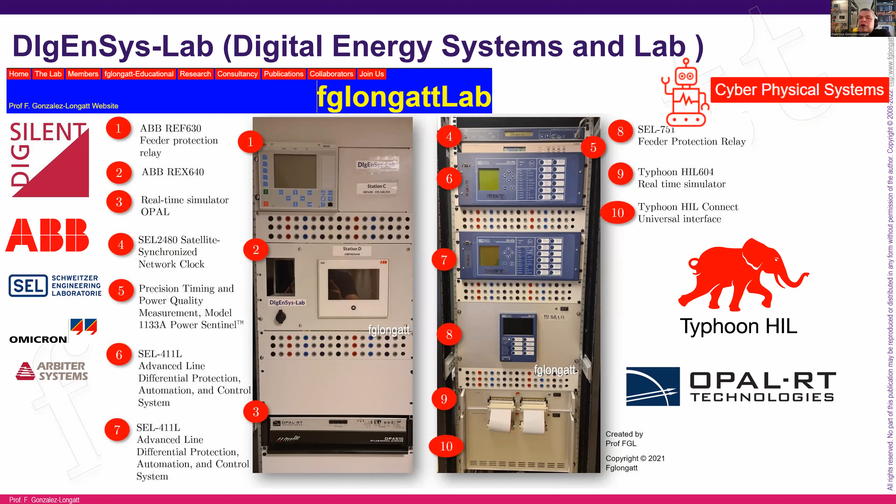What you need to know is that basically at DIgEnSys lab, we have been doing research for the past 3 years using 2 different brands of real-time simulator. Typhoon HIL, that you must be aware of. However, in a minute, I will give you more information. And then also OPAL-RT, another of the technologies that is quite relevant for real-time simulation.

Probably you are wondering, okay, why DIgEnSys lab? Because I am a strong believer that digital technologies can be used to improve the security and the resilience of power system operation, energy system operation. When we are talking about energy systems, there are several challenges around the world. In many countries, you will find issues related with frequency control, system restoration, system stability, voltage control, and thermal.

And to be honest, for all those problems coming from the integration of low carbon technologies, the solution is already near to us. What I can tell you is that in order to deliver secure and resilient electrical energy systems, we need to take advantage of several technologies. We can take advantage of decarbonization.

We are having more electric vehicles. We are having energy storage, and that energy storage is located near to the customer. For that reason, decentralization is a key point of solving the issues. And democratization, giving access to everyone to the market and to the energy system. And finally, for me, one of the key enablers of the future is digital technologies.

Digital technologies is a very interesting term because digital technology involves several things. It involves, of course, data science. You know right now that we care about artificial intelligence, machine learning, deep learning, and so on. This is one area of digital technologies, but also extremely important for digital technology is the hardware.

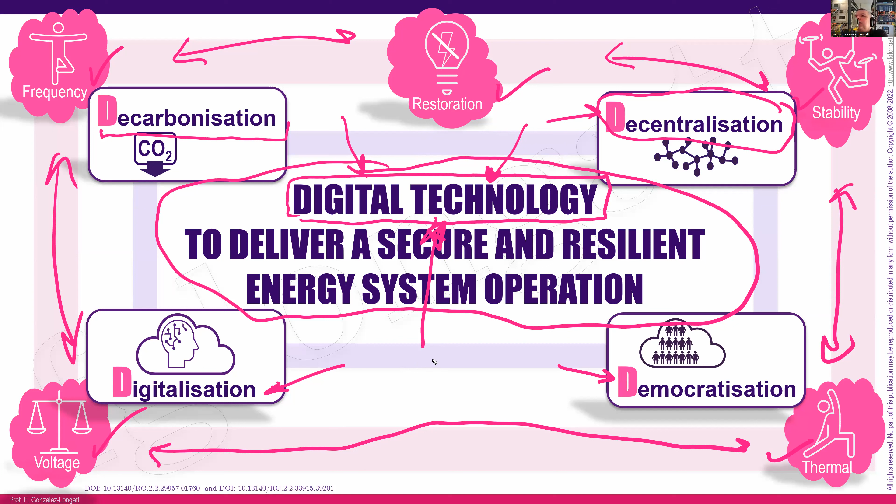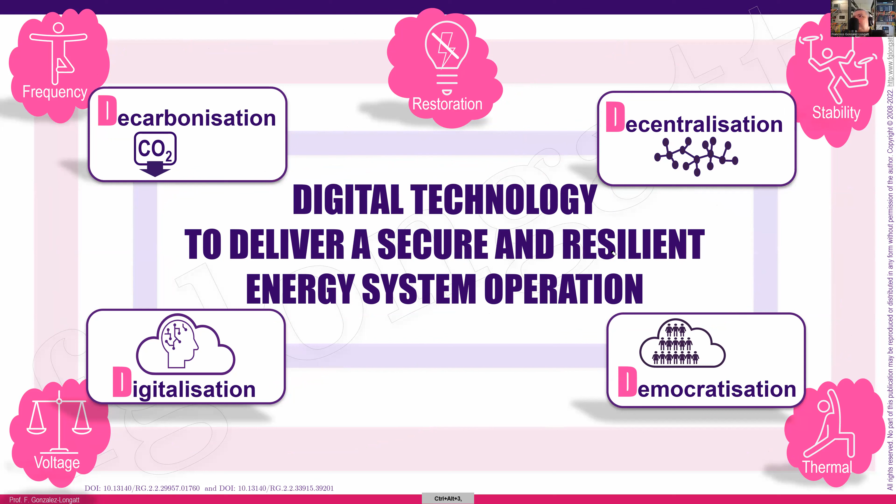The hardware, the computational power, is one of the key enabling technologies for the secure and resilient future energy system. And of course, the communication. We are living in a digital era, and communication is one of the key points. For that reason, today my presentation will basically show some of the digital technologies using real-time simulation in order to increase the security and the resilience of the electrical power system.

Well, this is the end of the introduction, and now I need to show you the agenda for today. The agenda is very simple; to be honest, it is very short. We will start with some general concepts. I usually like to go very slow at the very beginning and show you some basic concepts, because there are many people that don't understand those concepts. Then I will go through the different types of simulation in electrical power systems. Some of those simulations you already know.

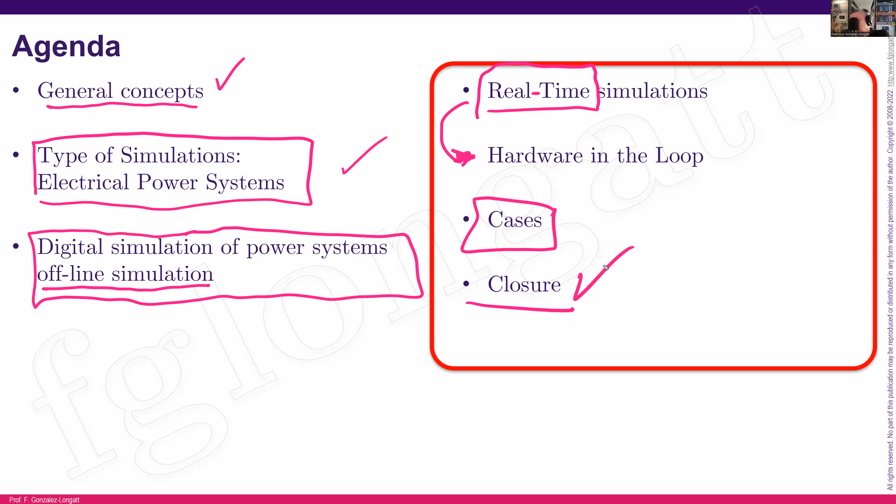And then I will go to digital simulations in electrical power systems, initially offline, and then I will go to the beautiful real time. I will focus basically on hardware in the loop, which is one of the paradigms used for real-time simulation. Then I will present some cases, and finally, we close this presentation, okay? Let me start with the concept.

Everyone in this classroom, everyone in this area knows a system. A system is basically a set or a group of different components interacting with each other, and all of them have a set of rules that unify the performance. For instance, in electrical power systems, we can imagine this as a small power system. We have a generator, we have an infinite bus bar, we have a transmission line.

However, if we look more into detail, we can see that the generation unit has several subcomponents. We have a thermodynamic system, if we consider this a steam turbine. We have a mechanical system, that is basically the steam turbine. Then we have the electrical system, starting from the generator, from the stator of the generator, going to the infinite bus bar. All those components have different environments and different physics behind them. And that is the starting point of the complexity in the electrical power system.

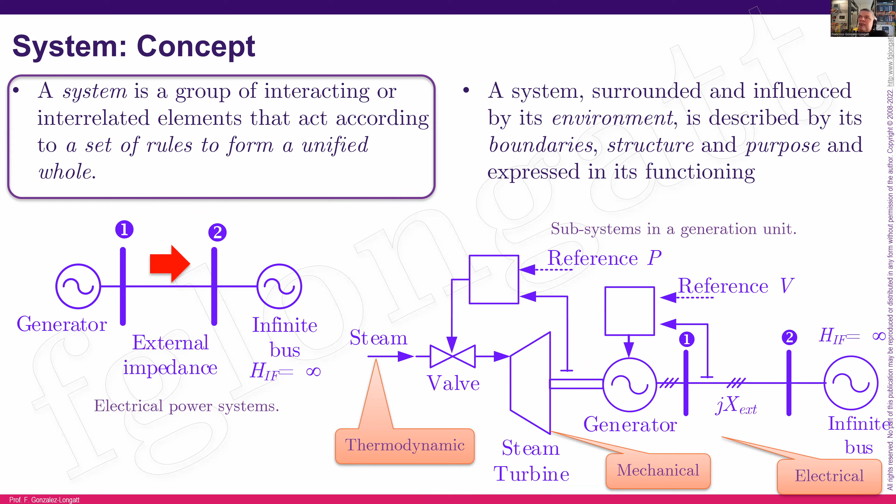On the other hand, the reality is that the systems are very, very complex because power systems especially are basically dynamic systems. The dynamic system comes from the original Newtonian mechanics. However, the concept is applied to electrical power systems because in reality, the electrical power system is a system where the state variables are evolving over time. And these changes in the state variables basically follow the possible changes coming from the input variables, but also some strange or difficult signals like disturbances, okay?

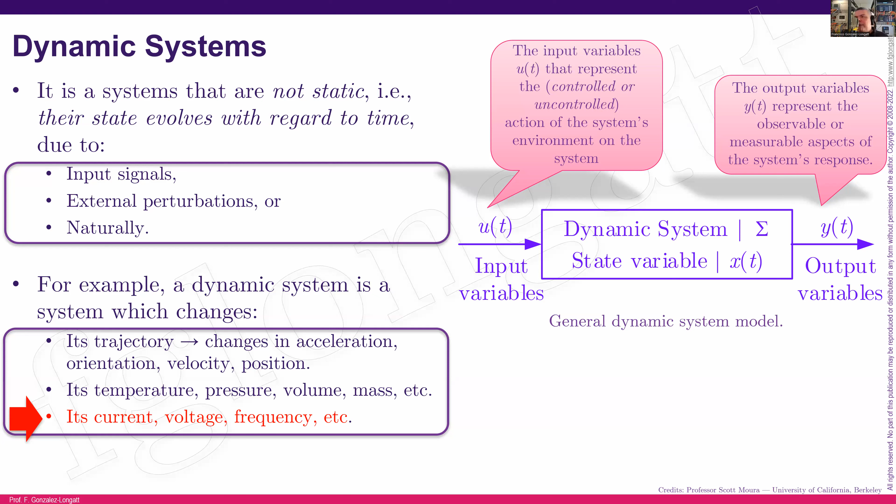However, electrical power systems are complex. They have different physical natures: thermodynamical, mechanical, electrical, and so on. However, the core for electrical power systems is to try to create models that replicate all that physics. And that is where the problem starts to be very interesting. Because in reality, we have the electrical power system with all the physics, but then we try to create a mathematical abstraction. The mathematical abstraction comes from the model and the equations. And then when we have this model and the equations, what we try to do is basically solve those equations in order to get the system response.

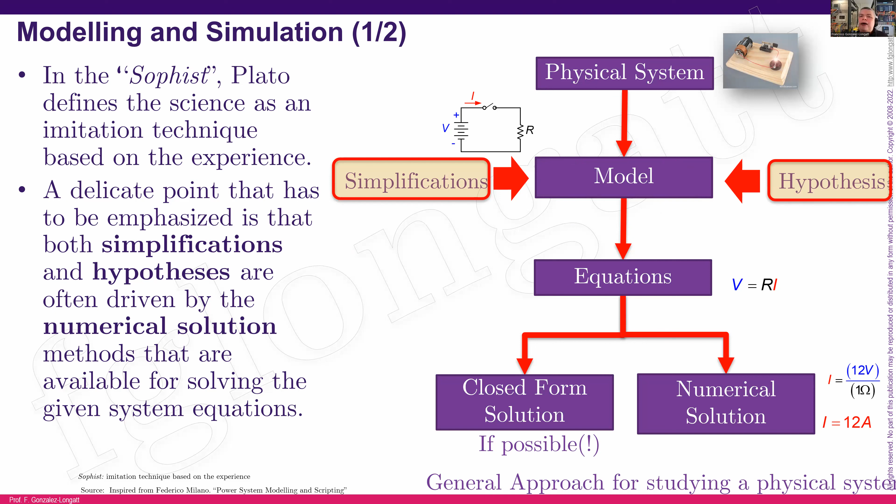To be honest, this is a process that looks very simple. However, there are two very important parts during the modeling stage. One is the hypothesis that we are following, and then the simplifications, because every single model has some simplifications in order to work. For instance, depending on the level of detail that you are interested in, you can model an inductor with the classical voltage and current relationship. That means voltage equals a constant times di/dt. However, if you want to get the full detail of the performance of an inductor, well, probably you need to go to the Maxwell equations.

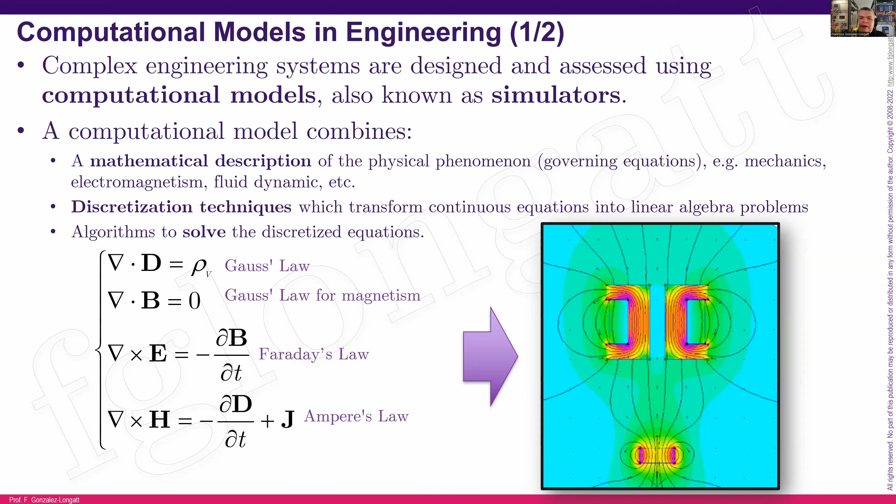What I'm trying to tell you is that the level of detail that you want in your model defines the size, the number of parameters, and the complexity of those models. And the reality is that also the size and the shape of those equations depend on the model. In the computational model, we try to create equations. Of course, those equations can be algebraic or they can be differential.

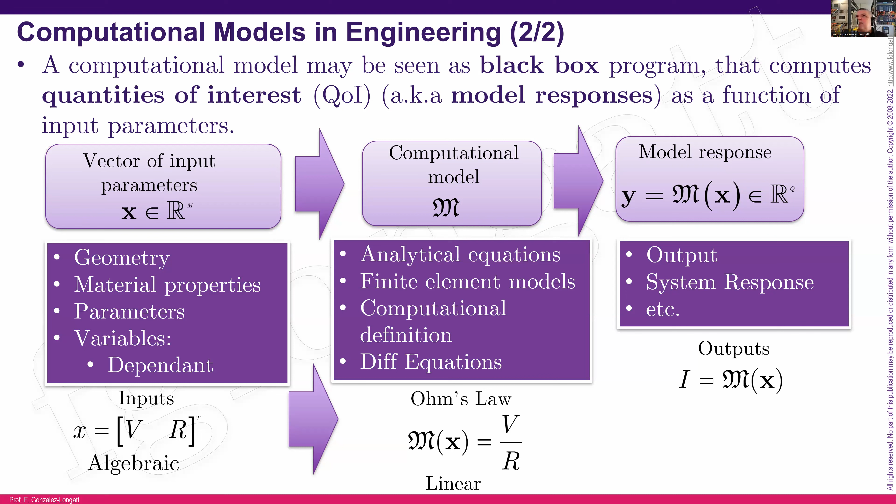Typically for dynamic systems, we use differential equations, and then we try to solve those equations. However, something that is very important during the task of modeling is that many models require validation and also parameter setup. Because in reality, we can have a very good mathematical description, but then that model must be adapted in order to follow the reality. That is the reason that one very important stage during the modeling is starting from an uncalibrated model that is not able to follow the data until we use some mathematical techniques and calibrate the model in order to follow the real data.

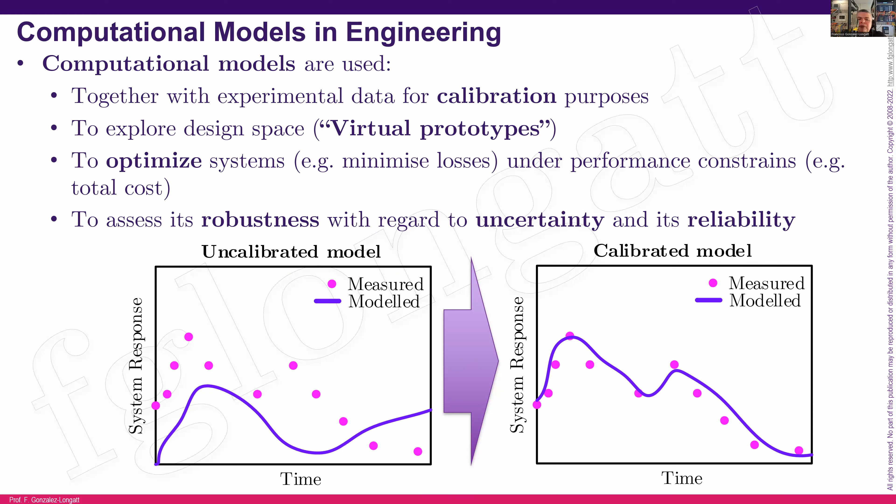However, even the most detailed and the most powerful models always have some possibility of miscalculating or misrepresenting the reality. Here in this slide, you can see something quite interesting. Here we have the 24-hour forecasting of the load demand in the Spanish system. And what is interesting here is if you look at a very small time period, you can see a very small deviation of the real demand from the forecasted demand. Many people will say this is probably a very small error, but if you look at the real numbers, we are talking about an error that can be 534 megawatts. That is huge in terms of power plant production.

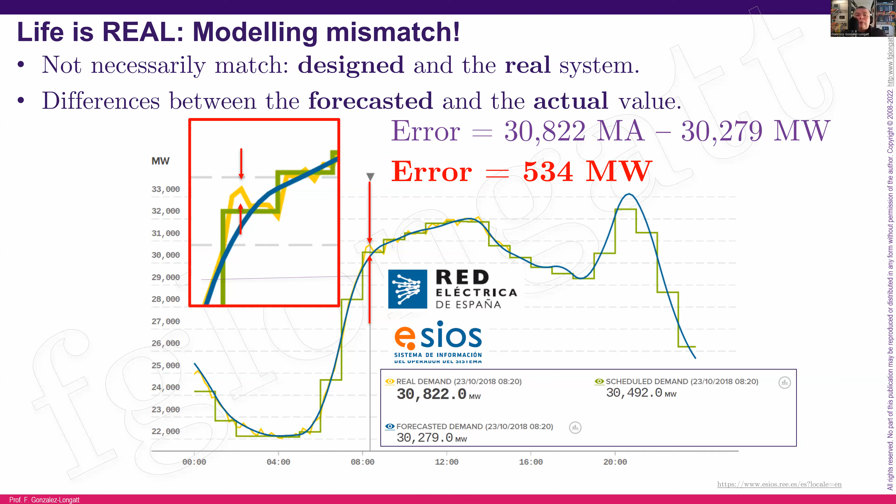What I can tell you is that basically the models have some uncertainties when they are working with the parameters, but also with forecasting. And the sources of those uncertainties can come from many, many places. For instance, from the load. The customer behavior is something that is very difficult to forecast, even using the most modern artificial intelligence techniques. Also, generation. Right now, we are installing a lot of renewables, and forecasting the PV or the wind speed is relatively easy. But if we consider the clouds that are obstructing the sunlight, that is a more difficult system. Then we have uncertainty coming from the controllers, from the parameters, from possible faults, communications, but also uncertainties coming from topology, electrical parameters of the grids, and so on.

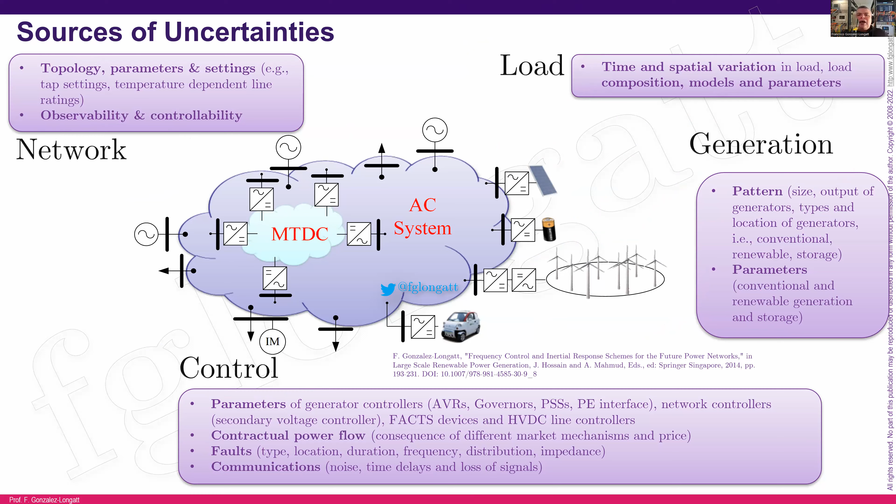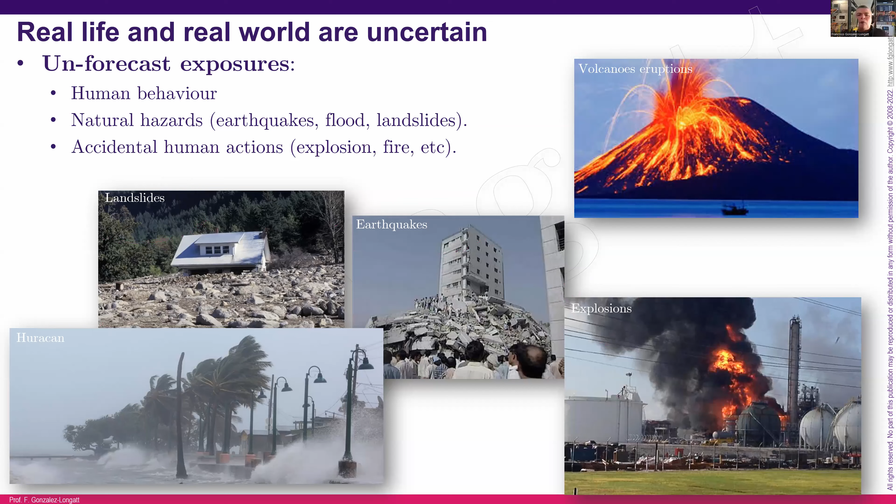However, to be honest, those uncertainties are very simple and can be managed. And there are in real life some uncertainties that are extremely difficult to forecast. For instance, in real life, we have several events that are very, very difficult to forecast: a volcano eruption, earthquakes, landslides, hurricanes, explosions, accidental human actions. And that is the reason that today we are considering more seriously the concept of reliability. Reliability is now considering uncertainties and also events that have extremely low probability. Reliability is a very interesting concept.

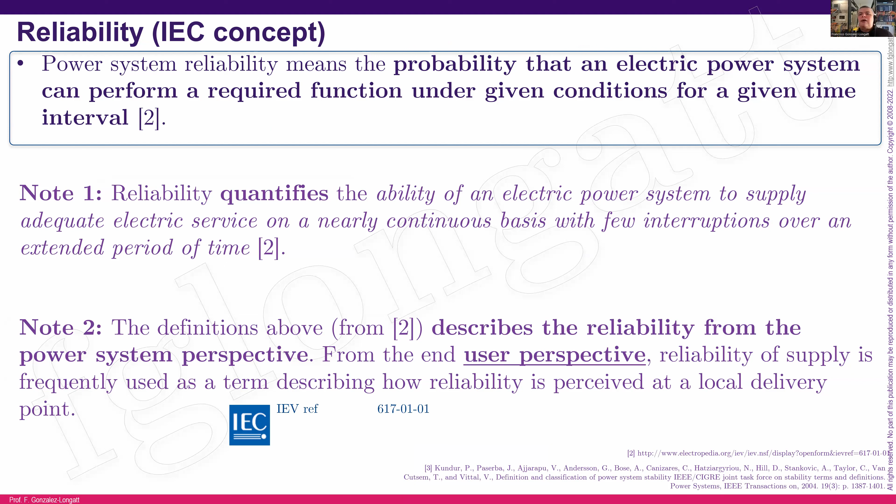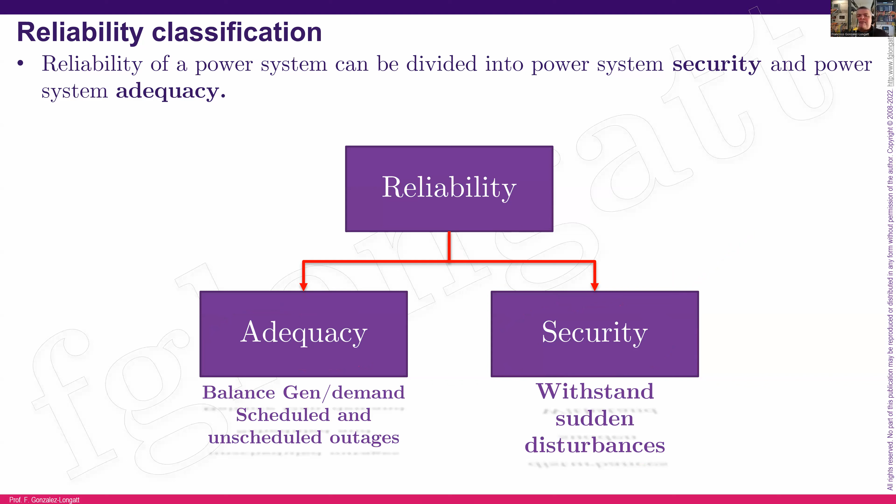Reliability is the probability that the electrical power system can perform its functions under given conditions for a time interval. There are many standards defining that, and reliability is basically divided into sub-areas. One is related to the balance between generation and demand, considering scheduled and unscheduled outages. That is adequacy. However, the most interesting one for me in electrical power system dynamics is security, because security is related to sudden disturbances. And to be honest, those events that I was talking about, like explosions, eruptions, and so on, are related to very low probability, but with a huge impact. And that is the reason that security starts to be interesting.

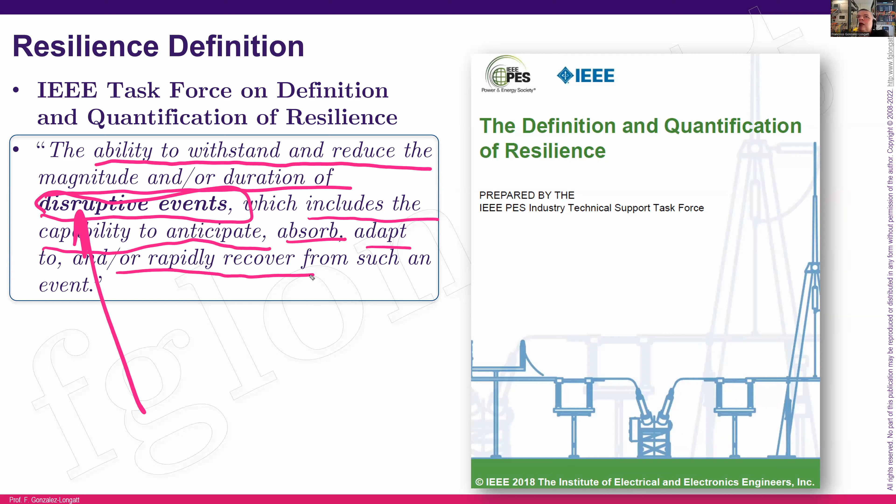In normal condition, what we call pre-disaster, the resilience, the status of the system is normal condition. But if suddenly we have a catastrophic event like earthquake, flooding, hurricane, typhoon, or whatever, well, the status of the electrical system can be disrupted and affected. And as a consequence, the system can experience, for instance, blackouts or a reduction in the performance indicators and so on. That is what we call the disaster stage.

The system has, of course, several controls, but also there are many engineers working in the system. For that reason, there is a possibility of restoration stage. That is the moment that the recovering forces in the electrical system try to reestablish the system status. And finally, there is a possibility of a long-term recovery process.

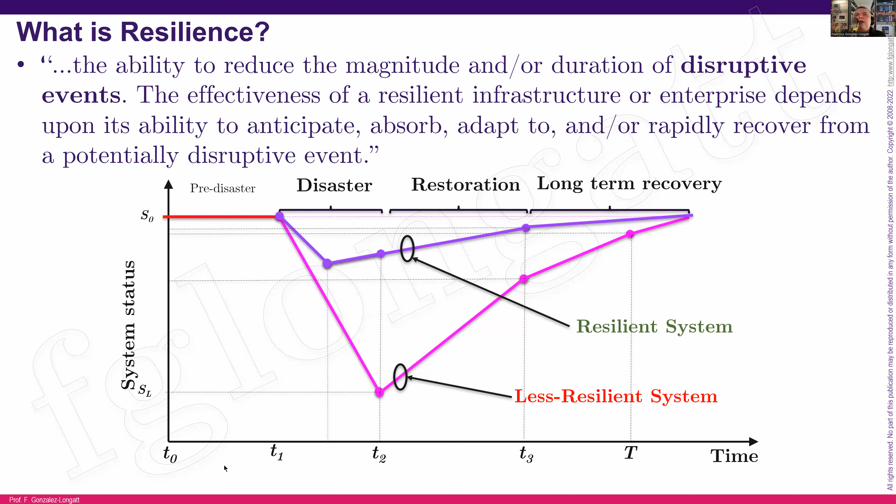Okay, this has been the representation of the resilience. We know the concept of resilience. What is the main difference between resilience and reliability? Well, I believe that everyone in this classroom knows the difference. Reliability is basically related with normal conditions. I mean, with events that have a high probability.

And to be honest, we have many situations in the electrical power system with high probability. For instance, the disconnection of generators, the sudden appearance of a short circuit, and so on. Those events are really bad for the system, but they don't create a disaster. In fact, this high probability makes the power engineers take some actions, and that is the reason that we have protection systems inside the electrical system, in order to cope with this kind of high probability events, minimizing the impact.

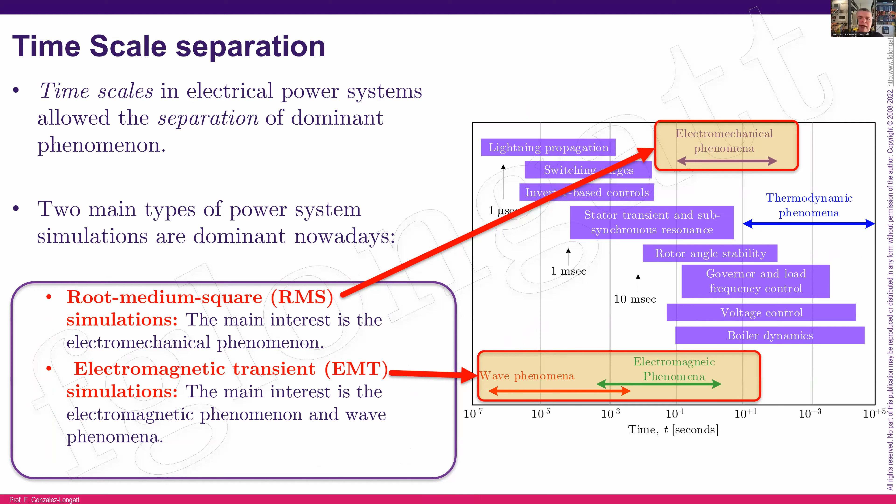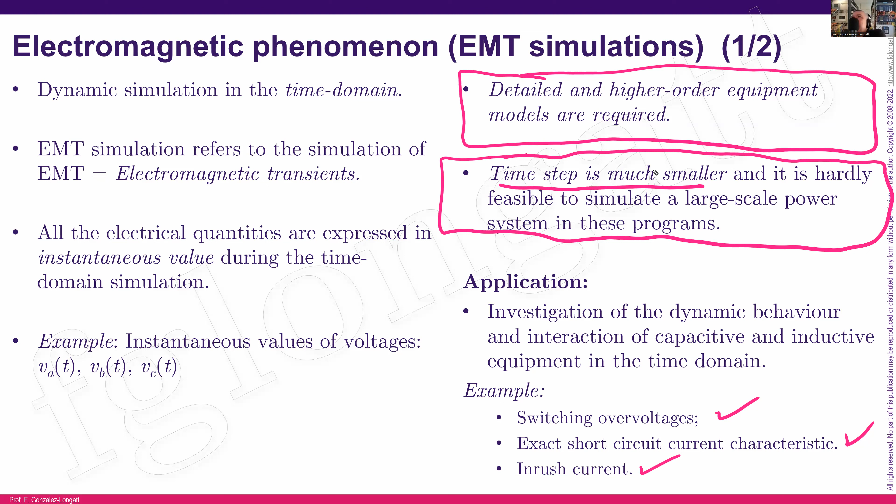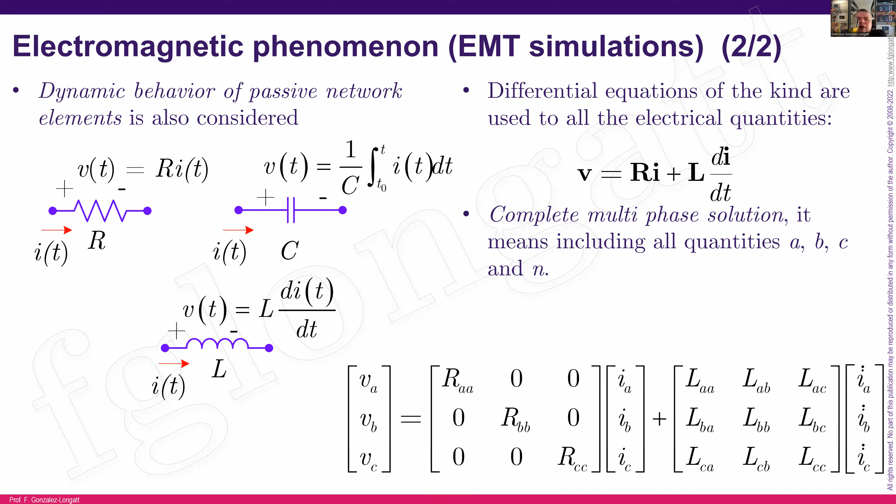And then we have another set of simulations. The other set of simulation is what we call the electromechanical phenomenon, or RMS simulation. In the RMS simulations, we make a very simple and a very interesting supposition.

And we assume, remember that I say assumptions and hypotheses, we assume that the transients related with the transmission lines or the transmission system are very small, very fast. And we can use the concept of phasor. I mean, when we are using RMS simulation, basically what we are doing is using phasors, assuming that the frequency is constant, or the deviation of the frequency is almost zero. And from there, we can use phasors and inductive and capacitive reactance in order to establish the relationship between voltage phasors and current phasors.

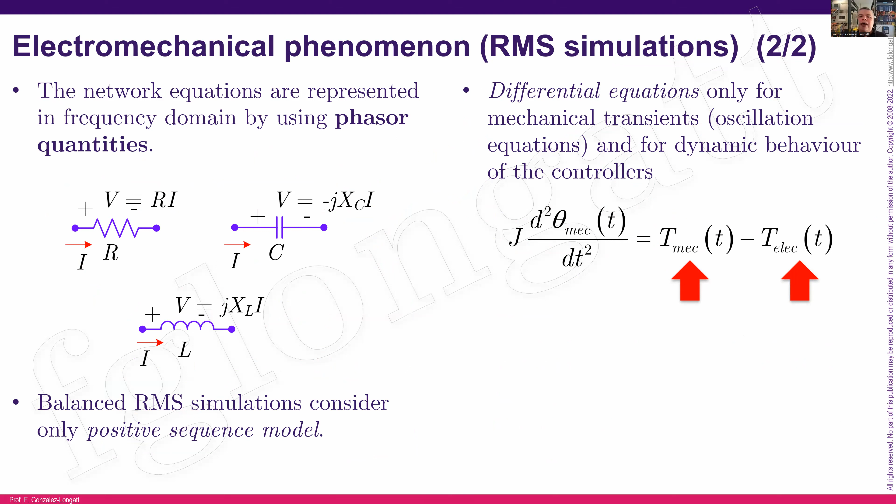Okay, perfect. Now, probably you are wondering why I am talking about this, because RMS simulation is typically the tool that we use for power system dynamics. And basically what we do is consider the dynamic of the electrical machine, the electromechanical dynamic, and neglect all the electrical dynamics. And that is the reason that we have different types of simulation tools.

We have simulation tools coming from many, many decades ago. Probably the first simulation tool that we have was the TNA. The TNA is also called an analog computer. Starting in 1929, we started to use the TNA. And what is the TNA? Well, you can imagine the TNA like very small components. I mean, you have small transformers, small generators, small transmission lines, and you play like a Lego. What you are doing is interconnecting all those devices using low voltage and, of course, getting the measurements.

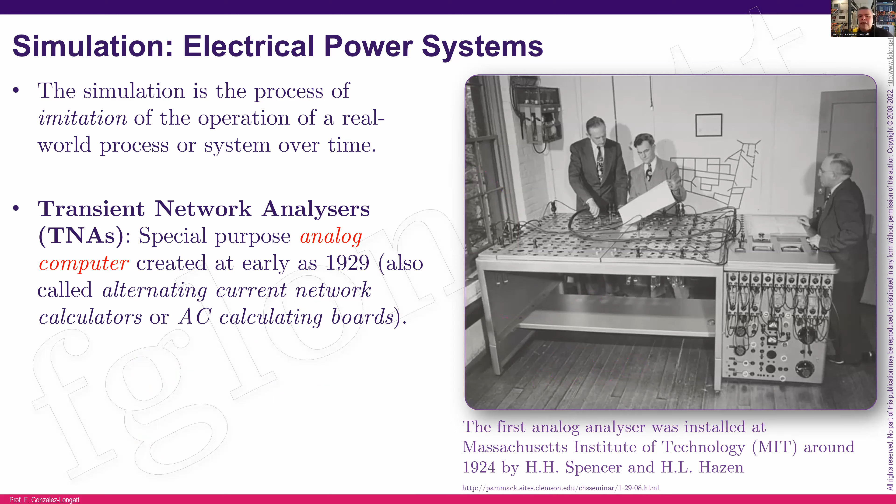What is the advantage of this? Well, this was the first computational tool that we used for simulations in electrical power systems. It was simple and it was useful for steady-state performance. However, there are many phenomena that cannot be scaled down, and as a consequence, the TNA started to be not so useful. The next step in the computational simulation of electrical power system analysis was the digital computer.

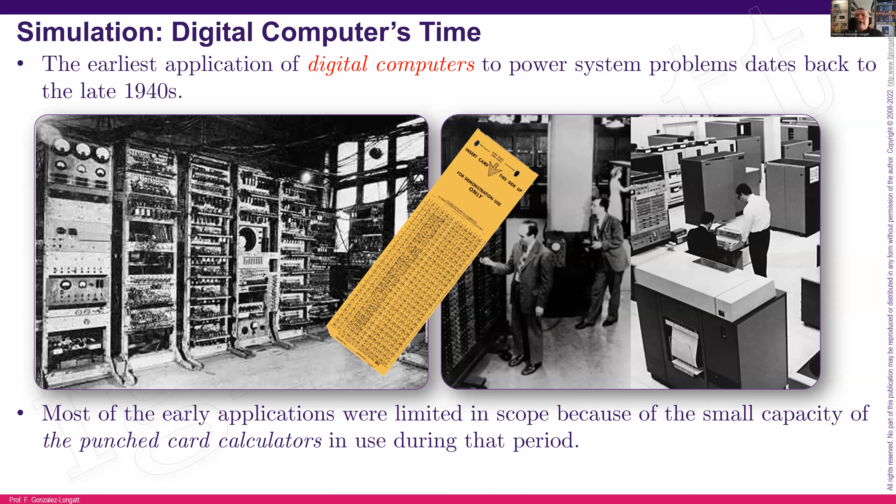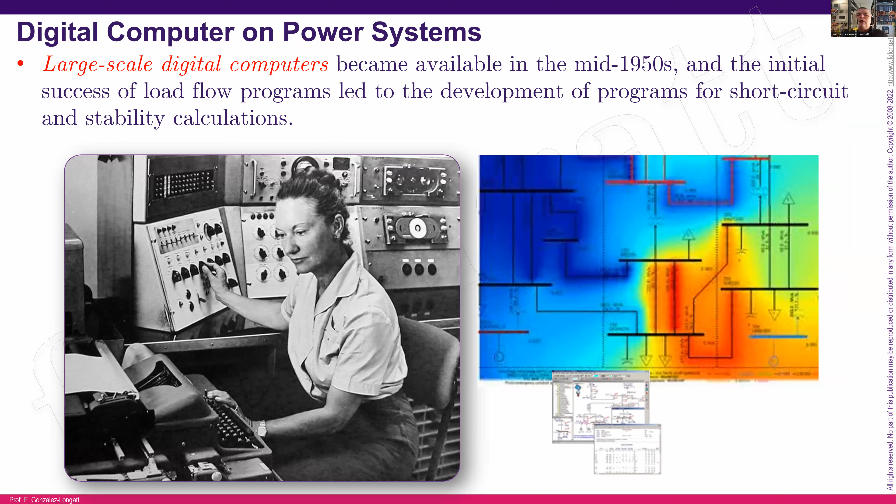The digital computer started in the 1940s, that was the starting point. We started to use those huge mainframes, using punch cards for calculations, and then appeared the large digital computers, starting in the mid-1950s. From there, the digital era started to be really important, and that is the starting point of more powerful tools for power system analysis.

Originally, this company was a research project from the Manitoba HVDC Research Center. In the 1980s, they started to develop real-time simulation, and finally, in 1994, they established the first real-time simulation and the first device. Then in 1997, again in Canada, I don't know why in Canada, OPAL-RT Technologies started the journey. They started digital real-time simulation using the OP5600. That was the first technological development of OPAL-RT.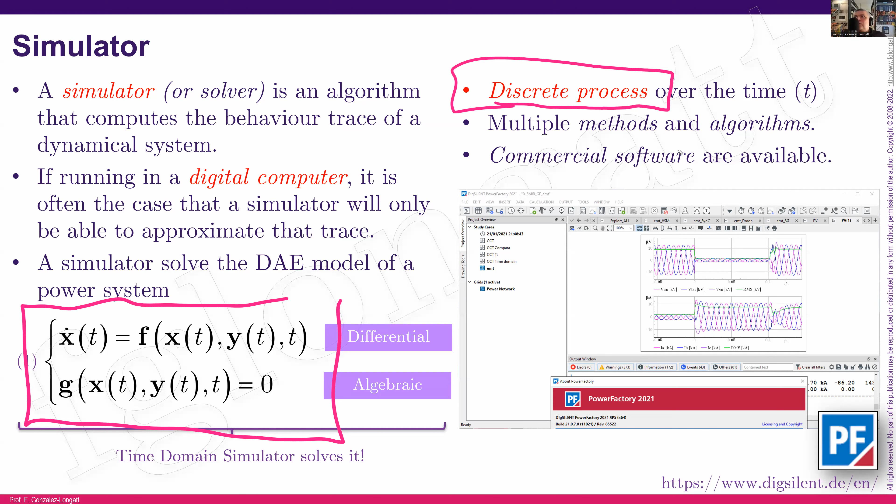What I'm trying to explain in simple words is we start here from a continuous problem. We have one equation that is a differential equation. We have an algebraic equation. This is a continuous problem. From there, what we do is take the time and divide the time into small pieces. And then inside those small pieces, we are solving in a systematic way the set of differential and algebraic equations. And that is what we call the discretized problem.

As you can see over here, the time has a subscript, and that subscript represents each one of those time steps. But now we have an issue, because we have the real time, and that is the simulation clock, and we have the computational time.

What does computational time mean? Computational time is the time that we require to solve these equations over here. And we can spend this time, and this time, and this time. But while we are solving that, the real time is moving forward.

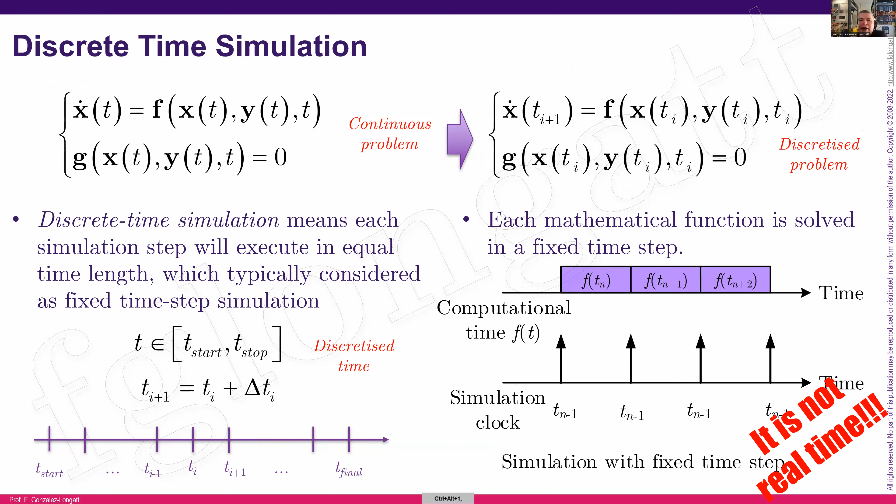What I can tell you is that when we are solving offline simulations, off-time simulations, we have two possible scenarios. Well, there are three, but the third one is not happening quite often. There are two important scenarios: faster than real time and slower than real time. What does faster than real time mean?

Well, if we are looking at the clock, you can see here a time step. And the solution of the differential equation: could you see that the solution is faster than the time we see on the clock? But the worst case scenario, and the scenario that typically happens, is that the solution of the differential algebraic model requires more time than the real time.

What I'm telling you is, if we start to solve second one and second two, and this is the computational time, and we are looking at your clock, you can see 1, 2, 3, 4. You can see that you get the result after we reach second number 2. That is what we call the offline simulation slower than real time.

For that reason, I will now show you a couple of examples, because people are typically confused about this. Let me start with this simulation. Over here, you can see the P.M. Anderson 9-bus system. The 9-bus system is a very well-known system, but I created a slight modification. Here you can see the load profile, and this is a 24-hour load profile.

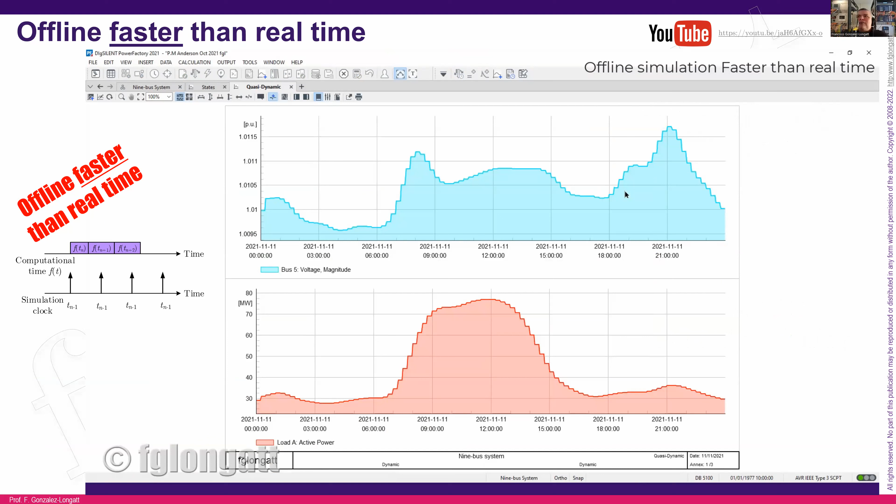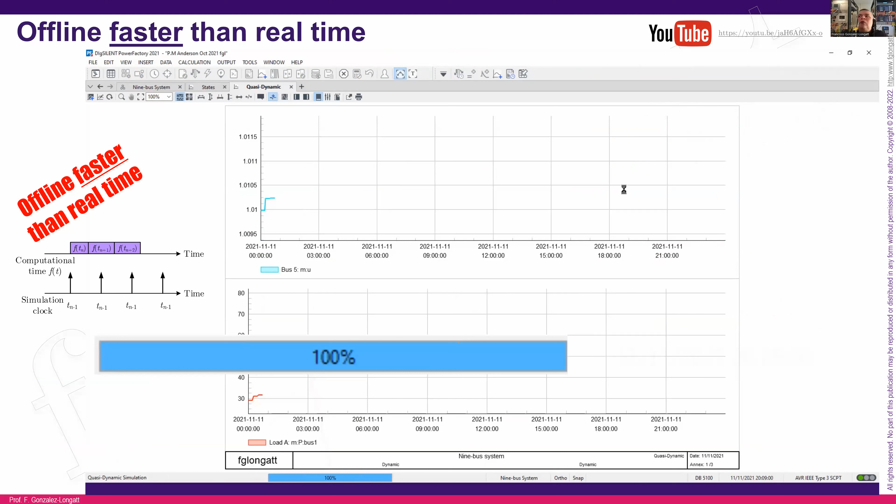If you want to see the full simulation, you can go to my YouTube channel, but I will show you here something quite interesting. I recorded this video and I will run the simulation using my favorite tool, PowerFactory. Wow, this was fast. As you can see, I am reducing the video speed, and right now I am running this in very slow motion. And you can see that to run 24 hours, I am taking 1.1 seconds.

That means that a simulation that is supposed to replicate the behavior of 24 hours is taking 1.1 seconds. This simulation is faster than real time. I'm sorry, I pressed the wrong button. But now let me go to the next case.

Now I am running an EMT simulation, and look over here. Right now we are running the EMT simulation, which is computationally heavy for this computer. And you can see something quite interesting. The clock on the top is the real clock, and the clock below is the simulation time. I don't know if you can see the discrepancy. Let me stop the simulation here.

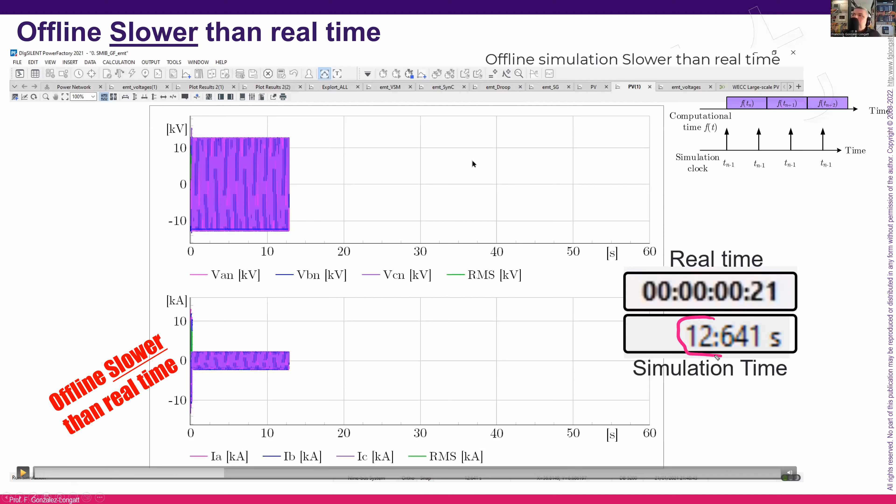What you can see over here is that to simulate 12 seconds, we are spending 21 seconds of computational time. What I can tell you is that this simulation, of course, is slower than real time.

And now I believe all my students in this classroom start to understand the complexity, because the complexity of real time becomes apparent: real time means that the simulation time and the real time must match. For many years, we have been using offline simulation. For many years, we didn't care whether the simulation time matched the real time.

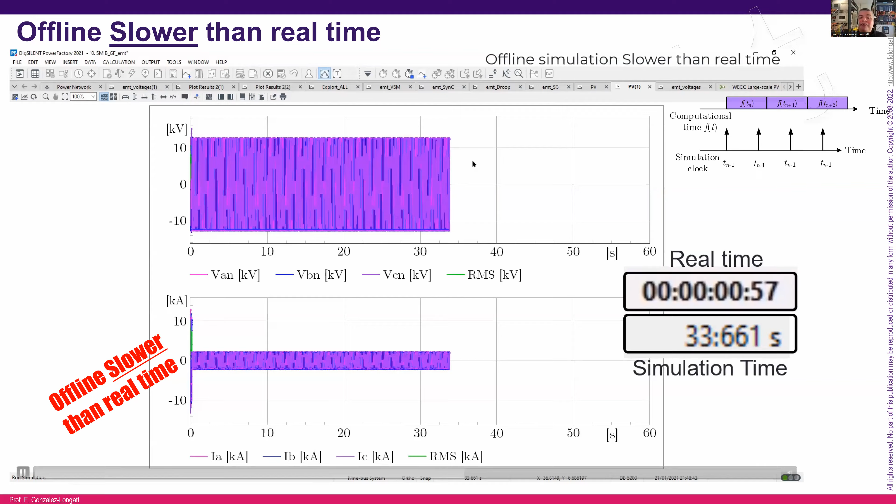But in recent times, power systems have become more complex. And the complexity of the power system is coming from many areas. It's coming from the diversity of the physical phenomena. It's coming from the nonlinearity of many of the power system dynamics. But also, right now we are integrating many things that are improving the performance of the electrical system, but at the same time are creating another source of problems.

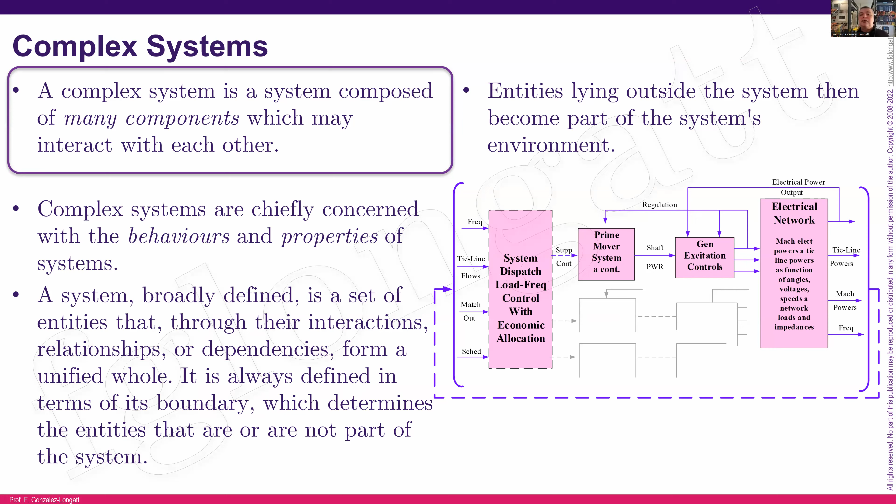We are in the digital era. In the digital era, there is a lot of software. There are many communication possibilities. There are also computational aspects, and all of them are creating a very interesting issue. Right now, we have some physical components that have a strong influence on the dynamics, but we also have communication, computation, and many other devices and aspects that are influencing the dynamics.

And most of them are coming inside a computer, a piece of software that is affecting the dynamics, and that is the cybernetic layer. For that reason, in recent times, the motivation to go into real-time simulation has been basically the need for integrating different phenomena: the physical layer, the synchronous machine, the transformer, the transmission lines, but at the same time the cybernetic layer related to communication, informatics, and computational power.

And that is when we start to care about digital real-time simulation. We start to care about digital real-time simulation because right now the controllers, the actions that we need to take in the electrical power system, must match the real clock that you have in your hand. That is the motivation behind having real-time simulation. The first thing that you need to know about real-time simulation is that 1 second in the CPU must be equal to 1 second in your clock.

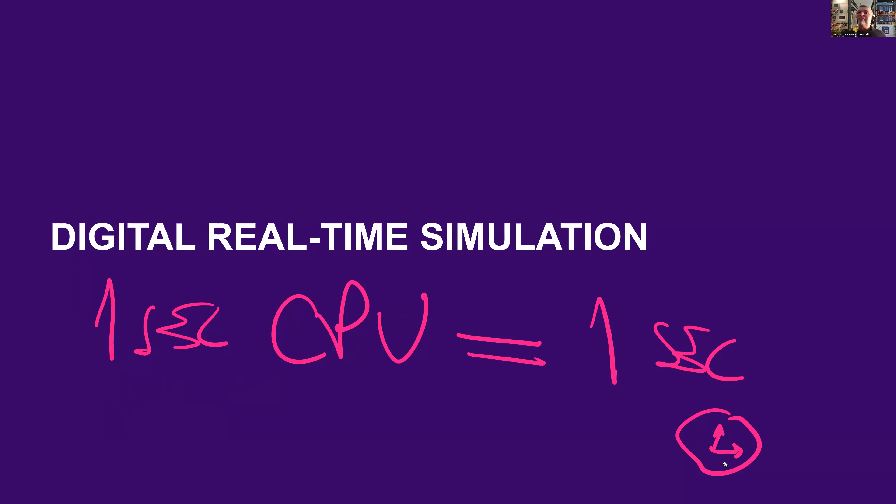And I don't know if you realize, but that is a huge technological problem. Because in the previous sections, I told you about offline simulation. In offline simulation, you can be faster or slower than real time, and to be honest, there is no problem, because if you are faster or slower than real time, nothing will be hugely affected. But in complex systems, where you have the integration of many components like informatics and so on, real time starts to be a very important thing, okay?

Now, what is digital real-time simulation? Well, digital real-time simulation means that we will be able to produce voltages and currents that match the real behavior of the electrical system. But I'm not talking about the instantaneous values. I am talking about the time. As I said before, in a digital real-time simulation, the time that you are using for computation should be equal to the time that you have in your clock.

And to do so, we need a device, and that device is called a real-time simulator. The real-time simulator has software and hardware, but the hardware is the very important component because inside the hardware, we have a CPU and we have an FPGA. Yes, we have a CPU that is similar to the CPU that you have in your computer. But now we have a piece of hardware that is highly flexible and reconfigurable, and that is the FPGA.

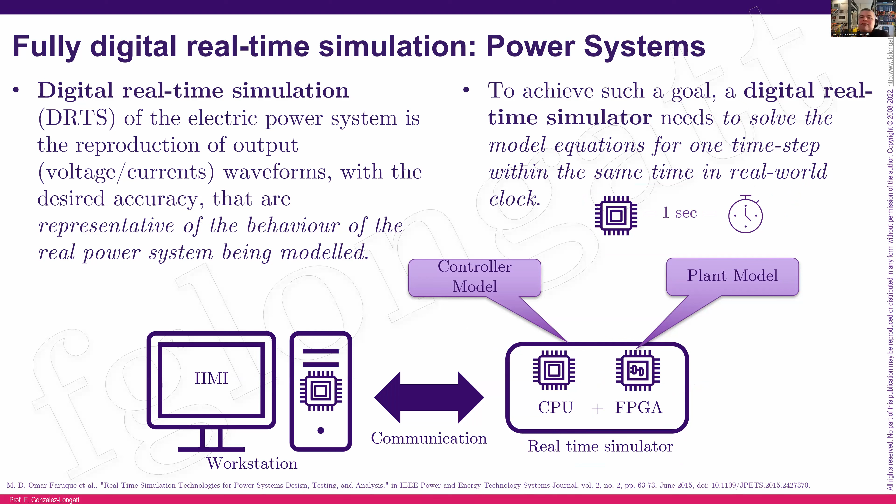But now probably you are wondering, where is the challenge? Well, the challenge is, if you remember, we tried to solve the differential algebraic model basically using the discretization of time. That means that for every single time step, we need to do something very important. We need to send data to the CPU, solve the equations inside the CPU, and produce results. Well, what we realized is that using the CPU and the FPGA, we can accelerate the computational power a lot.

Modern real-time simulators have a CPU that we use for solving problems with relatively small time scales, for instance, microseconds. And then we have other problems that need to be solved in a very fast fashion, and that is the reason for using this highly flexible, reconfigurable hardware, the FPGA. Here we are talking about a nanosecond time scale. The real-time simulator is doing this inside, and that is one of the reasons that the hardware of the real-time simulator is a bit expensive, because we require a lot of technologies, okay?

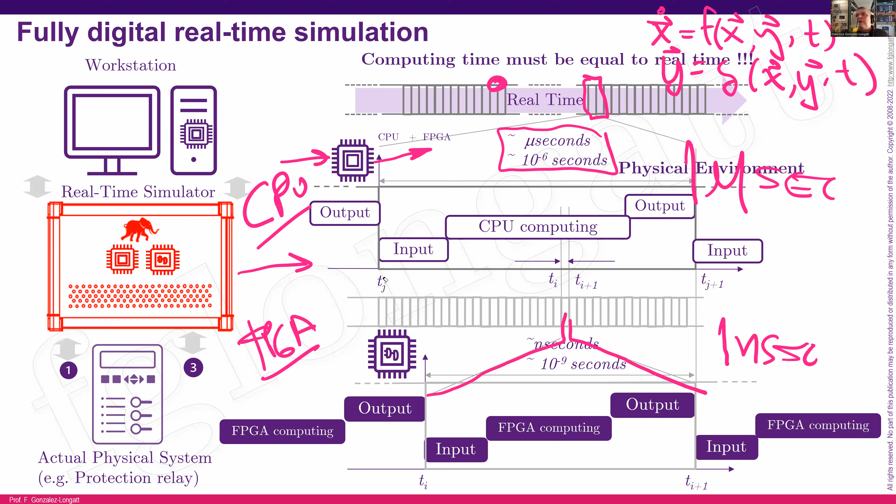Well, finally, the question is what to do with real-time simulators. Real-time simulators can produce signals, small voltages and small currents, but we can use those signals for testing actual physical systems. In a minute, I will show you some of the study cases, but you must understand that the physical system can be, for instance, a protection, a controller, and so on, okay? We are running out of time, but I will show you two of the basic implementations that we have in the lab.

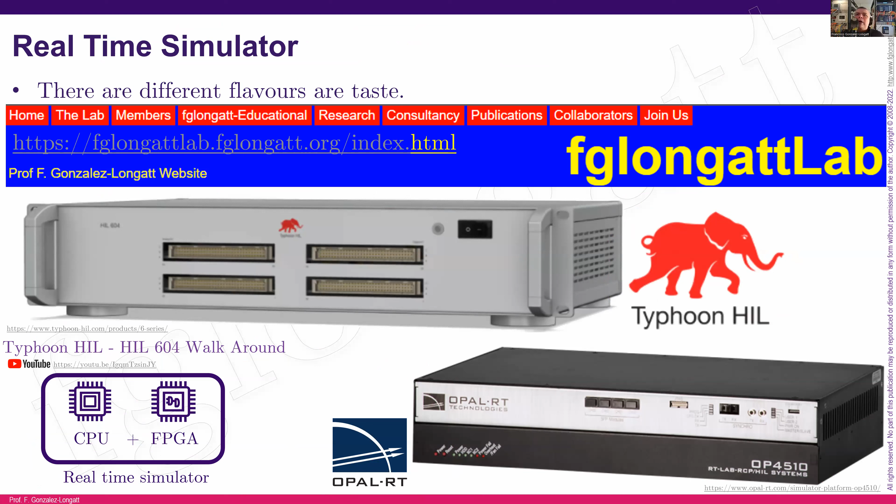In the DIgEnSys lab, we have Typhoon HIL technology and OPAL-RT technology, two of the most famous vendors of real-time simulators. Here, I can show you the internal components of one of them. This is an OPAL-RT 4510. Here we are using a CPU. This is the CPU; it's a multi-core CPU. And here at the top, you can see the FPGA. But more important, we have inputs and outputs, analog and digital, and those inputs and outputs can be used to interface with many components.

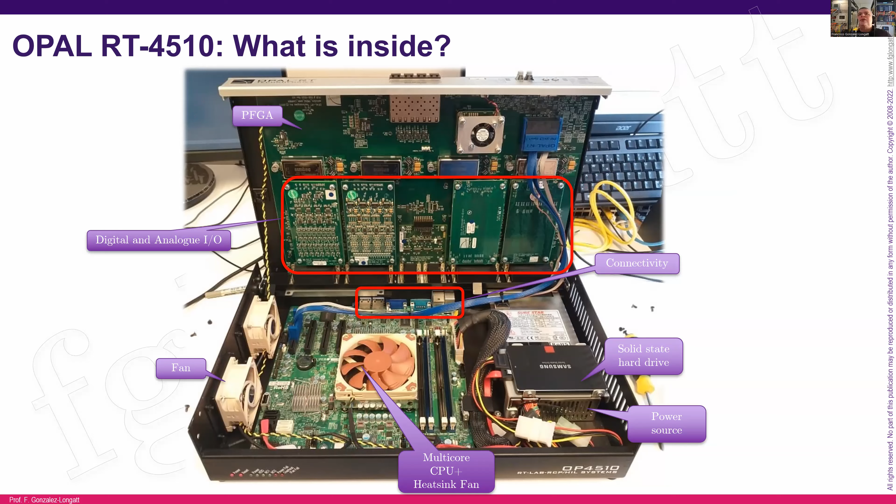And now what I would like to do is show you the paradigms that we can find using digital real-time simulation. Using real-time simulation, we can do what we call fully digital real-time simulation. In this paradigm, we can test models, we can test software, but where real-time simulation takes off and is brilliant is hardware in the loop. This is one paradigm, basically testing software or models in real time. But here is where things start to be very interesting.

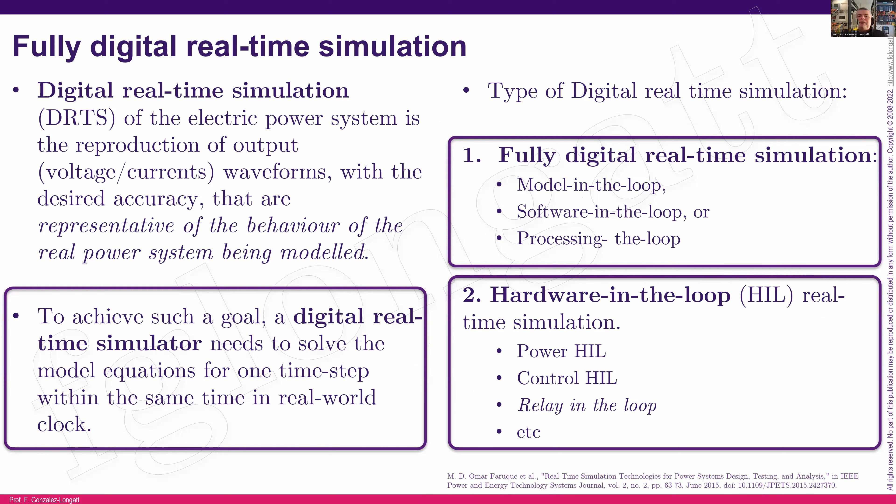Here we can use the real time connected to real devices, and we have power hardware in the loop, control hardware in the loop, and a paradigm that I have been using for 3 years, and that is relay in the loop. I can see there are several questions appearing in the chat, and I will try to cover them here.

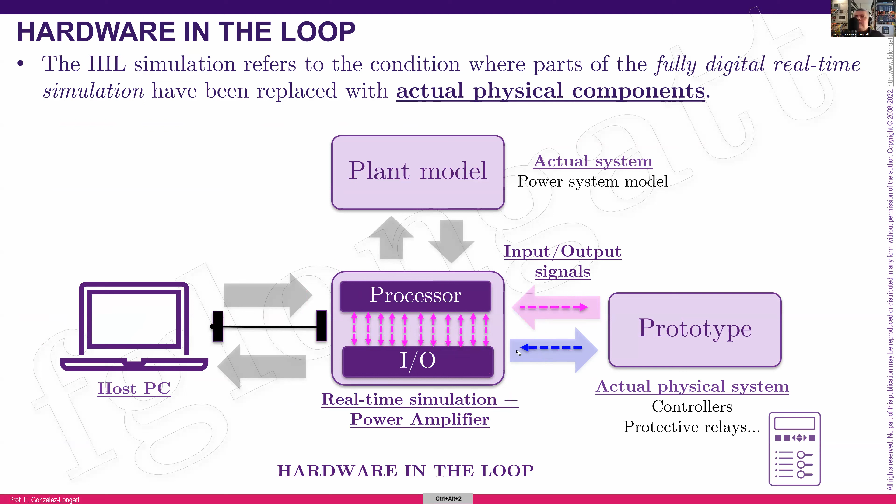Hardware in the loop is the paradigm that I love because it's where the real-time simulation shines. Because in the hardware in the loop, we are using the real-time simulator, but the real-time simulator has inputs and outputs, and they can be connected to a prototype. For instance, there are two approaches for the hardware in the loop. One that is low power.

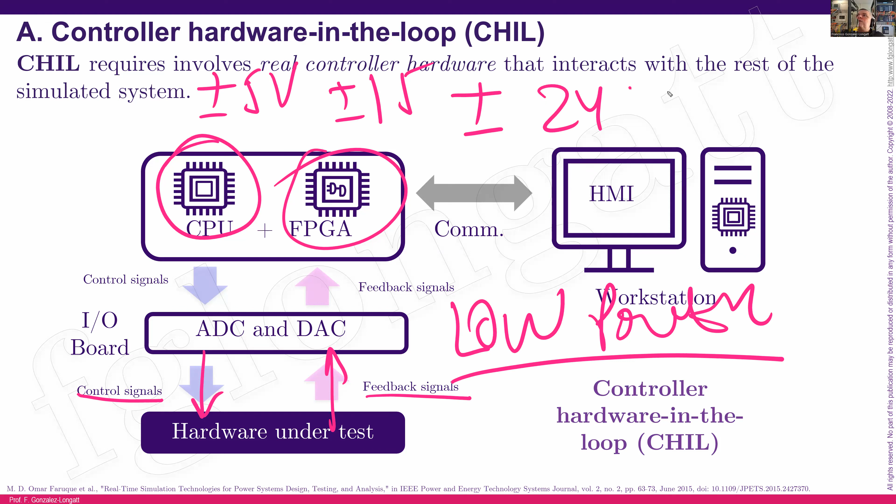I mean, we have the real-time simulator, we have here the CPU and the FPGA. They have the inputs and outputs, analog to digital converter and digital to analog converter. And here we can send and receive control signals and receive feedback, but this is low power. In a classical controller hardware in the loop, we can use +5 volts or +15 or 24 volts, depending on the manufacturer.

However, my favorite is the power hardware in the loop, because in the power hardware in the loop, you have your real-time simulation here, you have the converters for sending and receiving signals, but you have here what we call the power amplifier. The power amplifier is receiving those small signals of 5 volts, and here we can send and receive signals to 230 volts, 3-phase, or 5 amps, 3-phase.

That means that with power hardware in the loop, you can assess the real hardware. And for resilience, this is extremely important, because you can create here the model of your test system. Then that test system can be compiled and sent to the real-time simulator. And here you can create a disaster event. This disaster event can be a flooding, it can be a thunderstorm, whatever.

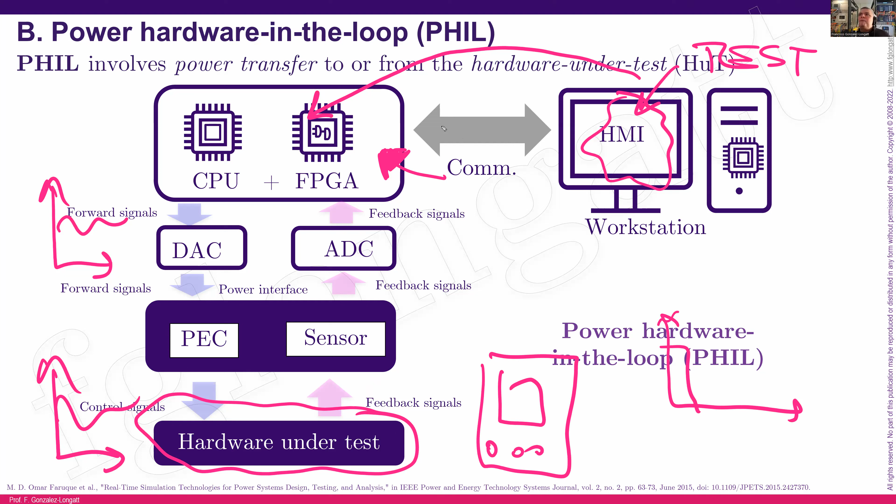And when we have this event, we can create signals, and those signals can go to a piece of hardware. For instance, we can use a relay, and the relay will receive those signals, and depending on those signals, the relay can create a response. And using the appropriate indicators, we can use this framework to test concepts related with resilience, okay? I will show you some examples here.

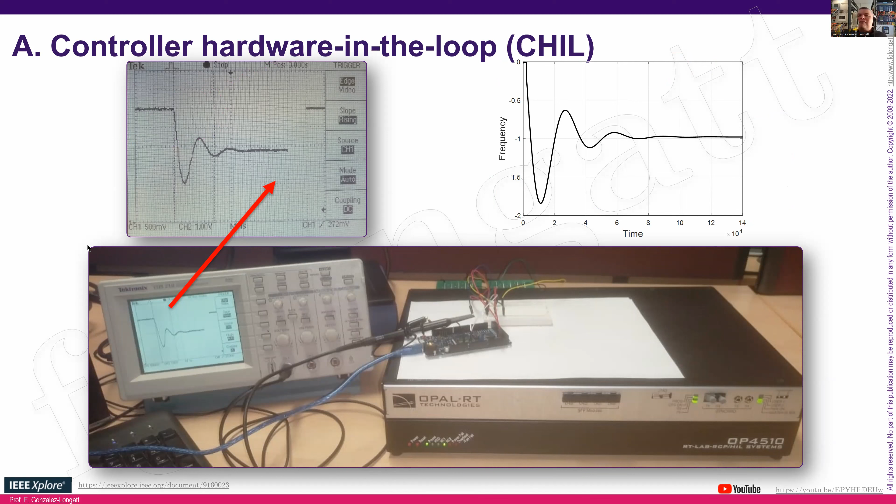Here you have the simulation. This is the offline simulation, and here we have the real-time simulation. I don't know if you can see, but there is a huge discrepancy. When you are doing offline simulations inside MATLAB and Simulink, those signals are perfect, smooth and so on. But when you are using digital real-time simulation to test your controllers, you can see here the noise. And that is one way that you can test the resilience of your controllers to survive different levels of noise.

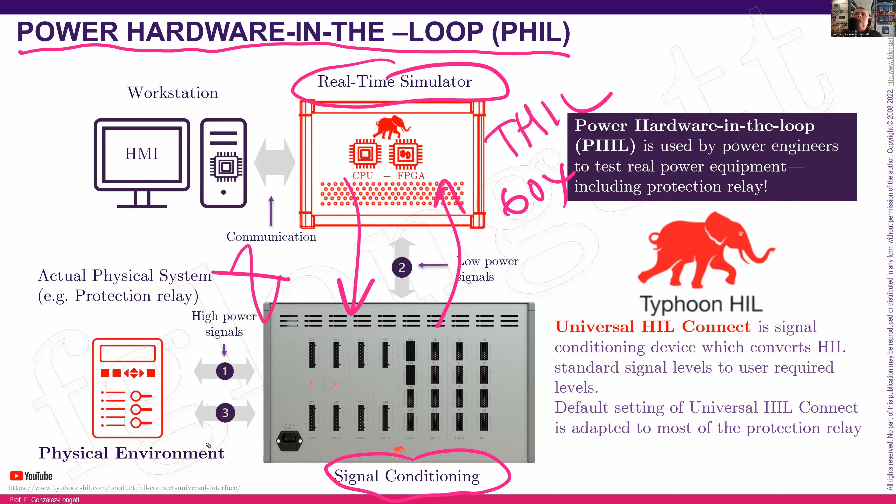Here I will show you some power hardware in the loop. In the lab, we have Typhoon HIL and we have signal conditioning or power amplifier from Typhoon HIL. For testing power hardware in the loop, we have the real-time simulator. This is a Typhoon HIL 604. And from there, we interchange signals with the signal conditioning. Here we are creating high power voltages and currents that we can send to the real device.

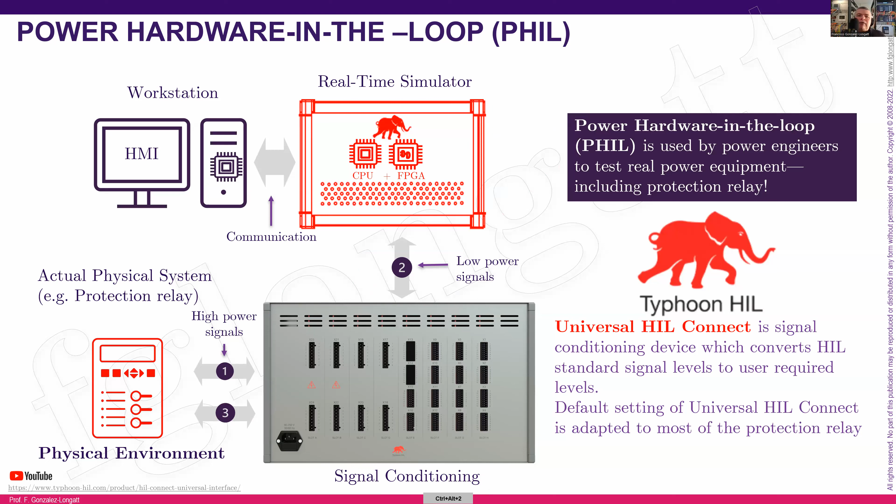And if you go here, you can see one of my favorite tests. This is something that my students in Norway used to do at the lab. Inside the real-time simulator, we have a network. In that network, you can simulate any kind of event. It can be a short circuit, it can be an open circuit, different kinds of events. And the real-time simulator is producing the signals, and those signals are sent to the protection devices.

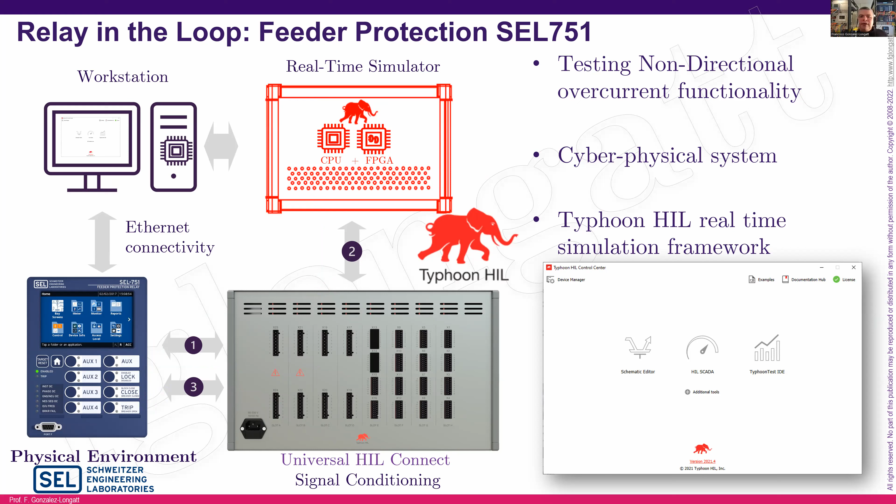Some signals coming from the relay, from the protection device, the IED, can be read by the Universal HIL Connect, or some other information can be sent by Ethernet connectivity, okay? And here is the physical implementation. You can see the 3 different devices. We have at the top the relay, the Schweitzer SEL-751.

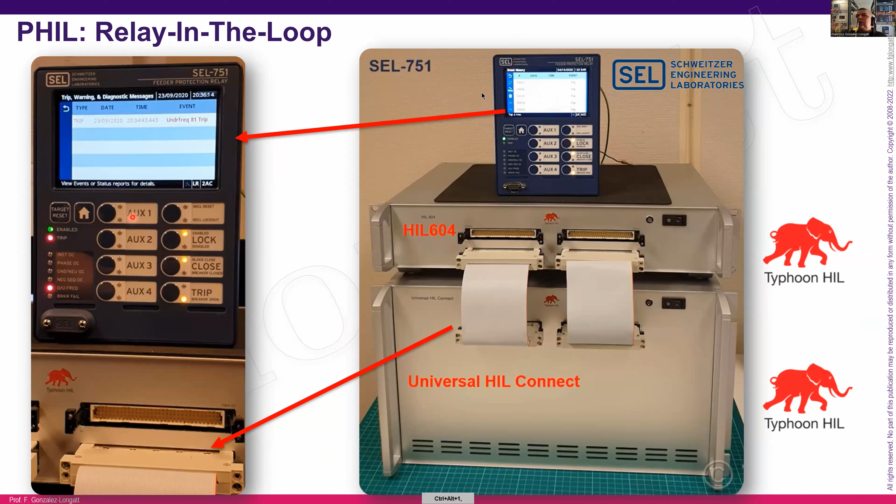Here we have the real-time simulator, and at the bottom we have the Universal Connect. And what is interesting here for all of you is you can see the real wiring. We are connecting the relay with the Universal Connect. And from the real-time simulator to the HIL Connect, we use low voltage signals, okay? What I'm telling you is that from here, we are sending signal plus 24 volts. And here we are sending the signals to the relay, 230 volts and plus minus 5 amps, okay?

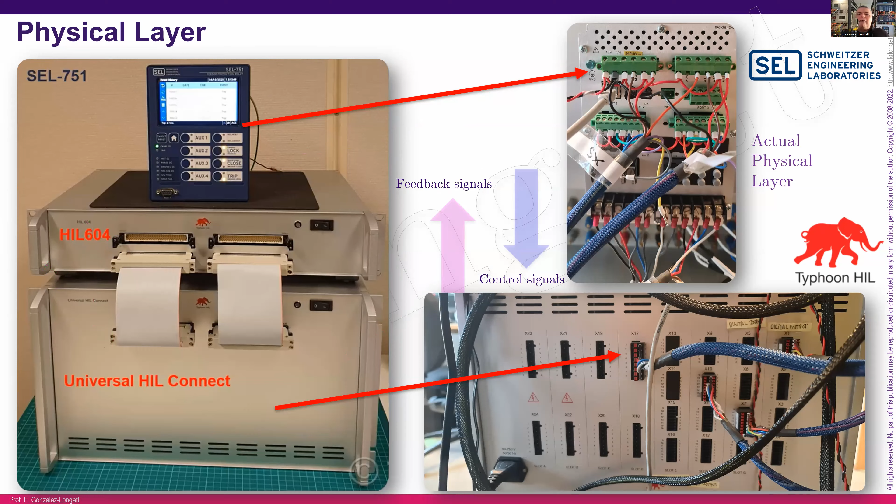Well, the students go to the lab. When they arrive to the lab, they have the electrical system. You can see here the electrical system. They can trip a signal for a short circuit. And when they are running the experiments, they can define the type of short circuit. It could be 3-phase, 2-phase, single phase, whatever. And they can apply the short circuit.

When they apply the short circuit, of course, the digital real-time simulator creates these signals in real time. These signals are created in real time. And of course, you can see the overcurrent, and the overcurrent is applied to the relay in real time. Of course, you can see the feedback coming from the relay that it trips the circuit and the breaker is open, okay?

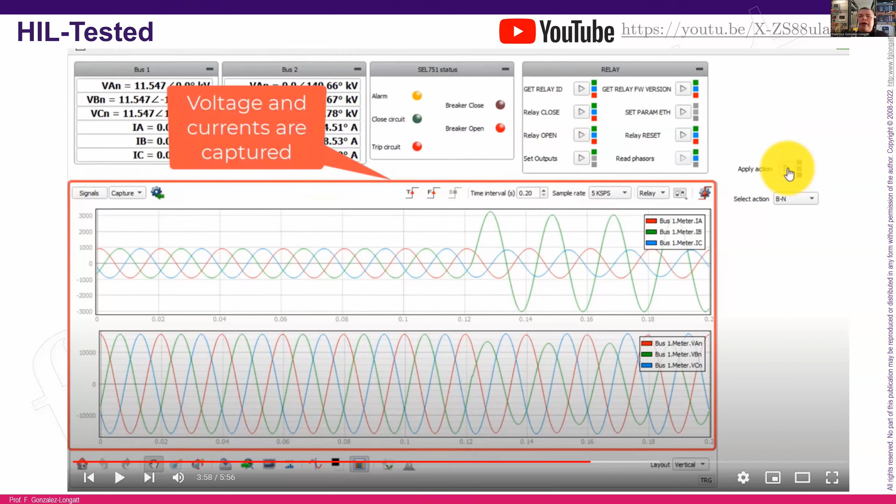Well, I am running out of time, but there are some other examples here, but I will go to one that is relevant for the person that asked me about communication protocols, okay? The reality is that power systems have been populated with communication mechanisms. For many years, we created several communication protocols and data protocols. One of them is the IEC 61850. And the 61850 is a standard for the architecture and communication of digital substations. Inside that protocol, we can have several layers of data flows, data streams. We can go from the very slow MMS until the very fast sampled values.

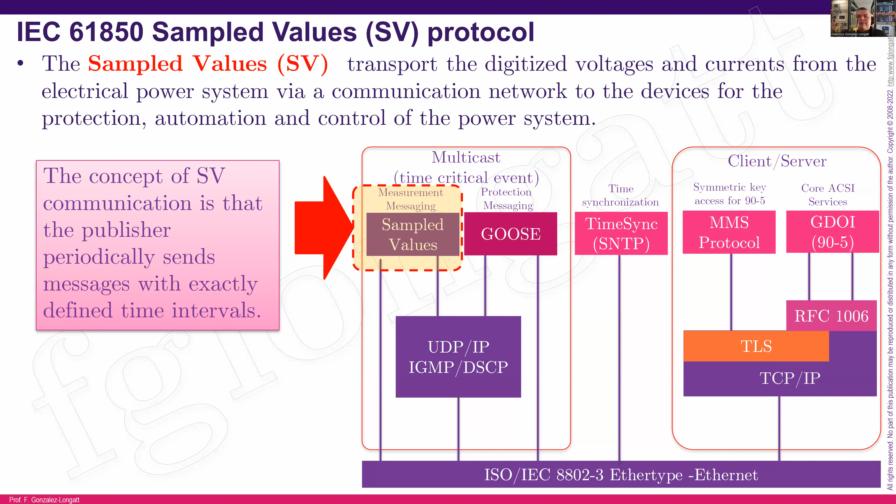I mean, if you use any software like Wireshark, a sniffer, you will see the data stream moving inside the local area network. You can see the data stream of IEC 61850 going into the relay. And that is very powerful, because if you are interested in testing, for instance, cybersecurity, you can use, for instance, another digital real-time simulator, and you can create your data stream with the attacks and go inside the local area network and test the cybersecurity.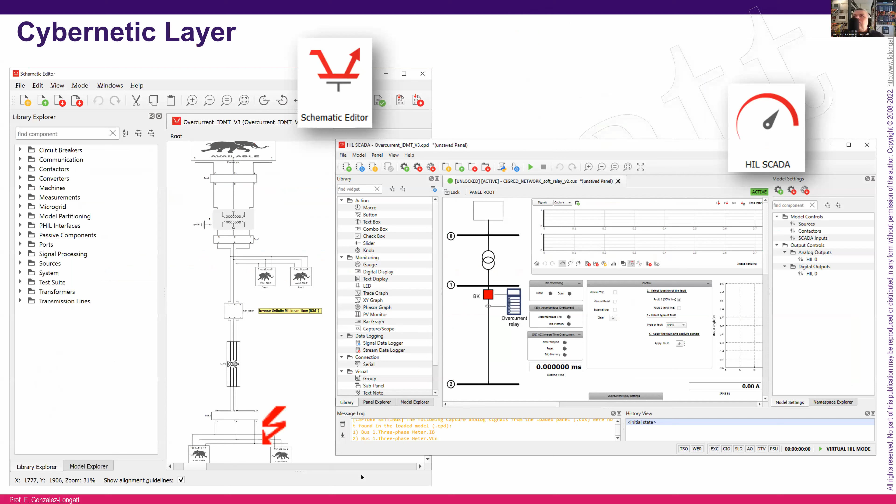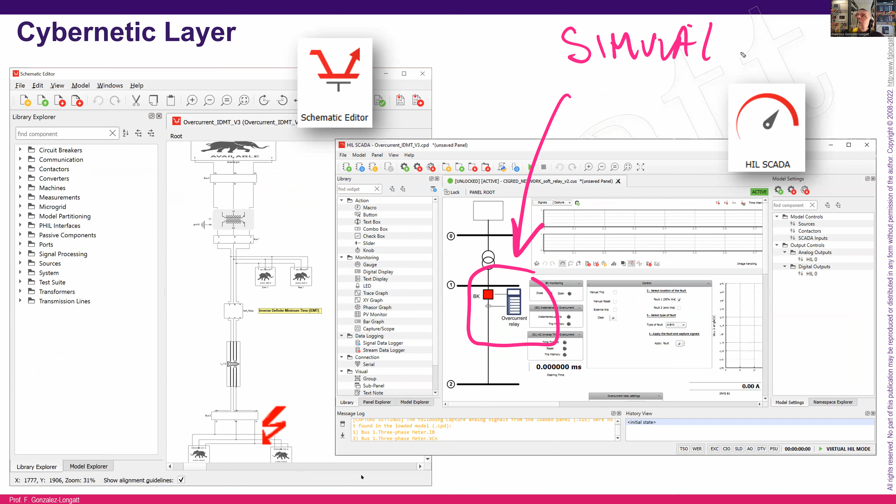I can see also another question in the chat that people are asking me if we can create soft relays. Well, to be honest, there is a possibility that is what I call a virtual relay. Something that we have done before is, instead of using the real relay, we create a digital twin. And the digital twin is very interesting because the digital twin is a relay that is simulated, but the relay is taking real signals, real voltages and real currents. That is what we call the soft relay.

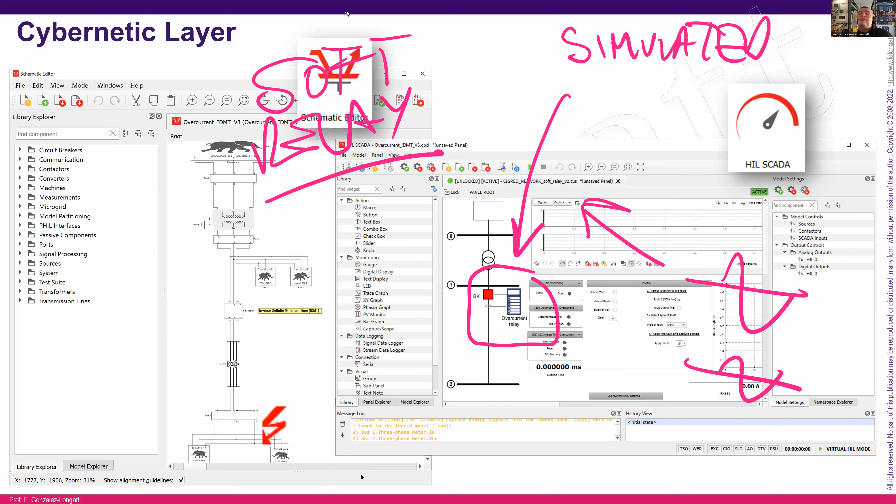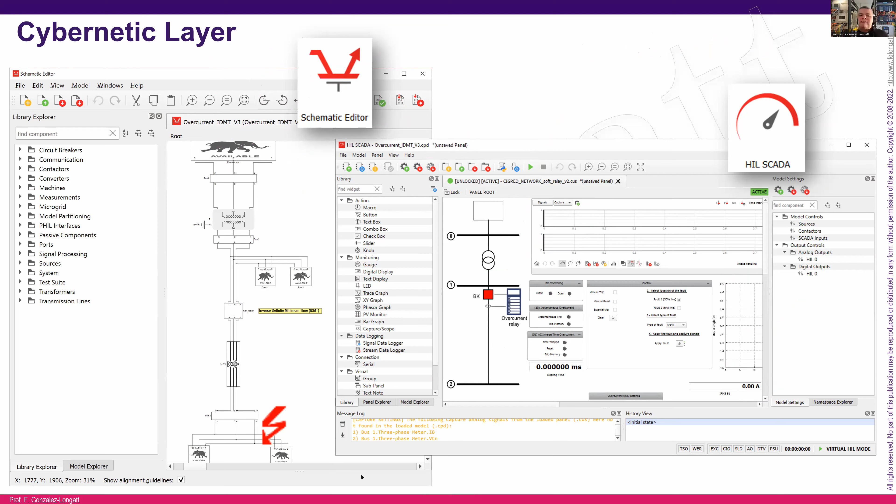The soft relay is a digital replica, a digital reproduction of the original relay that can behave like the typical relay. But what is important is if you can create a relay inside the real-time simulator, you can modify the algorithm and you can use it for developing your own relay. I mean, if you want to test a different algorithm for the overcurrent or the distance, or if you want to create a physical location of faults algorithm, you can do that, okay?

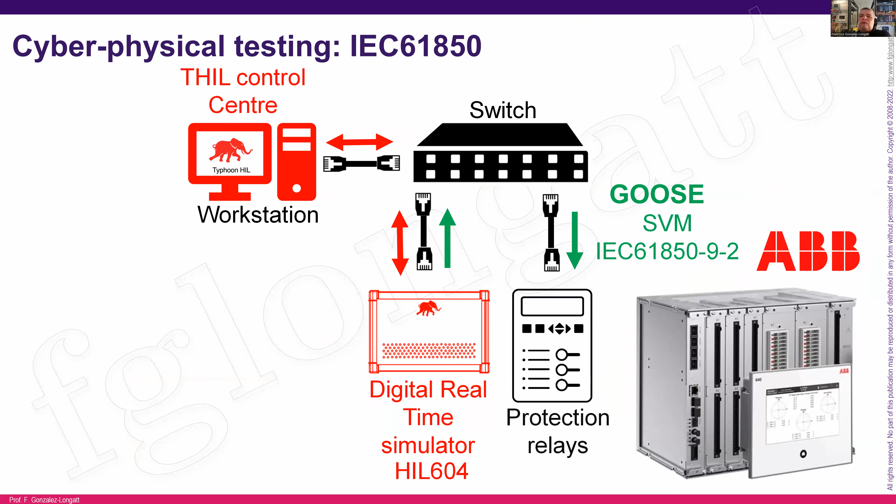Here I want to close this discussion about the IEC 61850, because you can create the real data streams, and with the real data streams, you can test the real devices. And this is a very simple and very realistic way to test the relays, but also this tool, creating these communication protocols inside the real-time simulator and creating data streams, if you're interested in protection, opened the door for developing virtual protection functionalities.

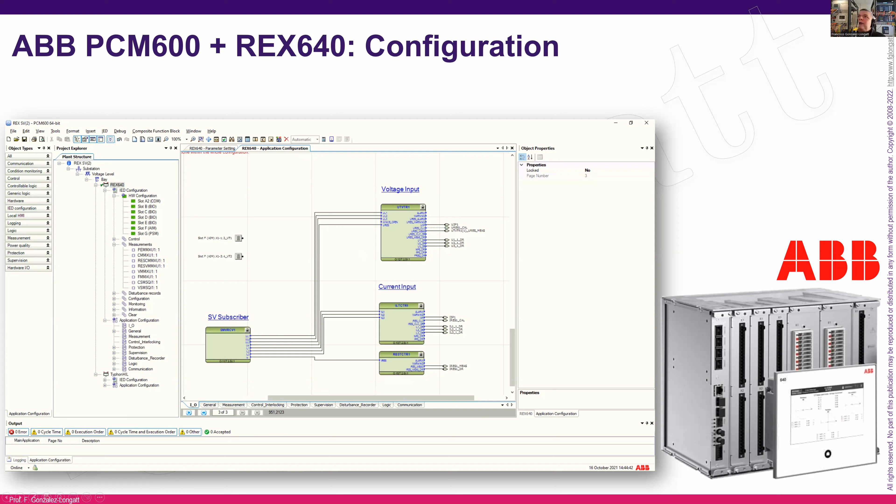And that is something that one of my PhD students in Norway is working on. He is working on digitalization and virtualization of protection functionalities. And the core of this is basically communication protocols and real-time simulation, okay?

Well, it's time to close this presentation. I am almost 1 hour here, and I would like to close this presentation telling you the following.

To be honest, the electrical power system is still the same. We have the same generators, we have the same transmission lines. However, the new technologies, renewables, electric cars, batteries, and the integration of networking and computation is changing the way that the power system is behaving. And to be honest, to reduce the cost of analyzing these kinds of situations, we need new tools.

That is the reason that recently we have been talking about cyber-physical systems, because the reality is that the same cables are still there, the same generators are still there, but the novel low-carbon technologies came with networking and computational power that we need to include inside the power system analysis. And for that reason, the way that we are analyzing the system must change.

And that is the reason that several companies, several utilities around the world, are changing the way they do the simulations. Just for example, there are countries like Australia that are considering and using real-time simulation for their studies in order to be sure that the system is secure and resilient at low synchronous generation levels, okay? Finally, I have one more minute.